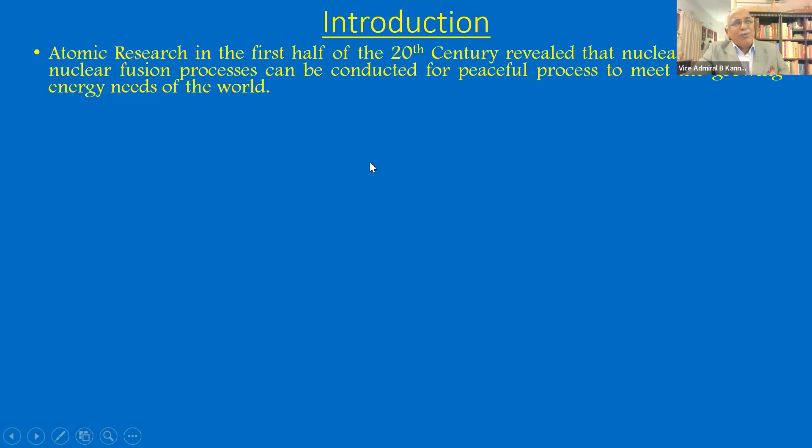As usual, I give an initial slide, which is an introduction to the topic. Atomic research in the first half of the last century, the 20th century, revealed that nuclear fission as well as nuclear fusion, both these processes, can be conducted for peaceful purposes to meet our growing demands for energy. Because all along we have been associating nuclear with the nuclear bomb, which was dropped at the end of the Second World War, or just before the end of the Second World War. But nuclear energy can also be used for peaceful purposes, as it was proved thereafter.

So fission reactors became very popular in the last 65 years. I'm just taking something like from 1955, 57 onwards - it became very, very popular. And today, there are 430 fission reactors operating in 30 countries, including India, to provide 1/10 of the world's energy needs in a clean form. Please remember, there is no carbon emission, or very limited carbon emission, when you have a nuclear power plant, unlike a coal thermal plant, which releases a lot of carbon. And today our major worry is carbon dioxide emission. So fission reactors are associated with clean energy, and 10% is coming from fission reactors.

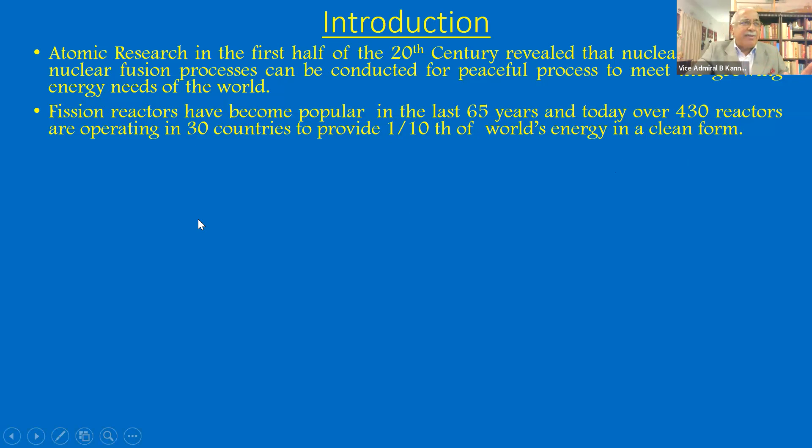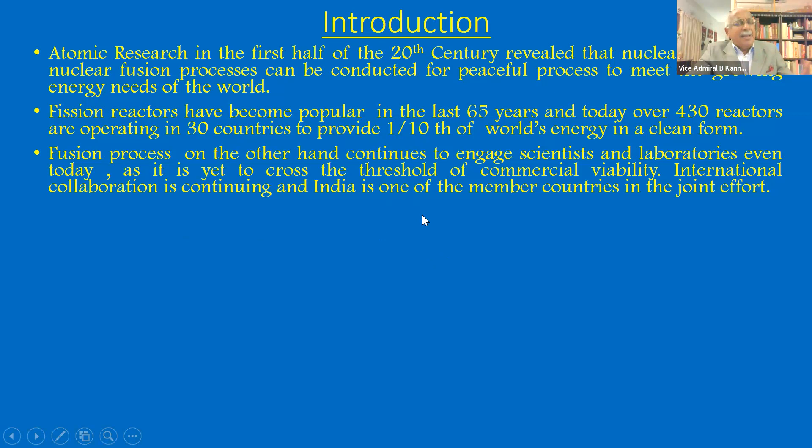Fusion process, which is the other way of getting nuclear energy, continues to be in the lab. It has not come out of the lab into the commercial viability sector. It remains as a process which has been verified in the lab. It has gone into prototype reactors, and there's a lot of effort going on by USA and France and many other countries joined together as an international collaboration to design, manufacture and operate a fusion reactor. But that has not happened. Some successes have taken place - I will talk about that a little later. But today, we have only fission reactors operating in the world. Everywhere in the world, it's only fission reactors which are taking place.

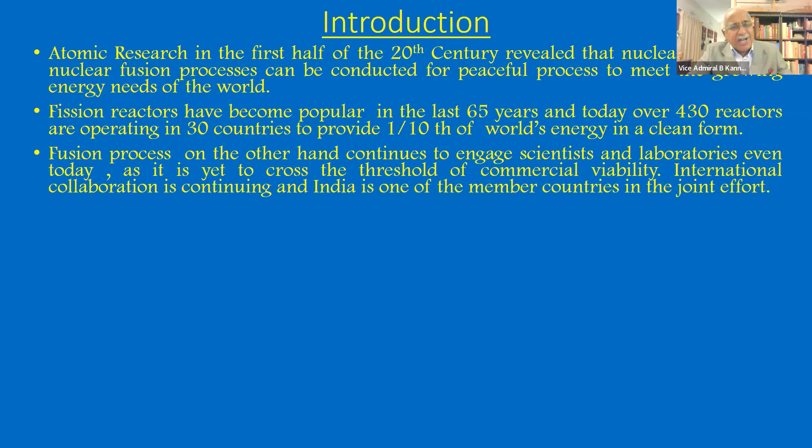But one important thing which you should remember: fission reactors require fissile material as fuel, and the most popular is natural uranium - that is uranium as available as an ore in the Earth's crust. So fission reactors require uranium, and India has very, very limited resource of uranium. Just remember this: reactors require uranium, and India has got very poor stock. Naturally, we have very poor stock of uranium in our country.

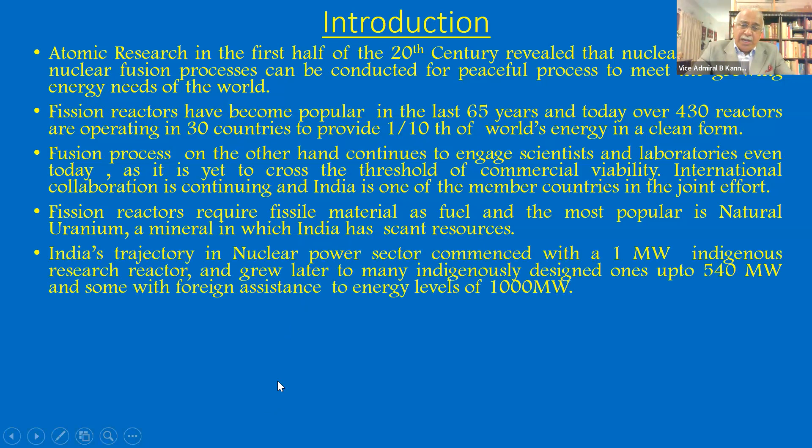India's nuclear power sector, if you see the starting, was a 1 megawatt indigenous research reactor. And subsequently, it grew from 1 to 100, 100 to 200, 200 to 540. We reached up to a 540 megawatt reactor made in the country, indigenously designed, and in some places we are taking foreign help. But recently, we have gone up to 1,000 megawatts - 1,000 megawatts is 1 gigawatt. There are some electrical engineers here, they will understand better. And with some foreign assistance, we have been able to set up reactors up to 1 gigawatt per reactor. India has also designed and manufactured a reactor for an Indian-built nuclear submarine.

So in a nuclear submarine, the reactor drives the submarine underwater. And that requires fuel as well, uranium. But there they use enriched uranium. Enriched uranium is more potent, more powerful. It can give more energy. And its life will get longer because it has got higher energy content.

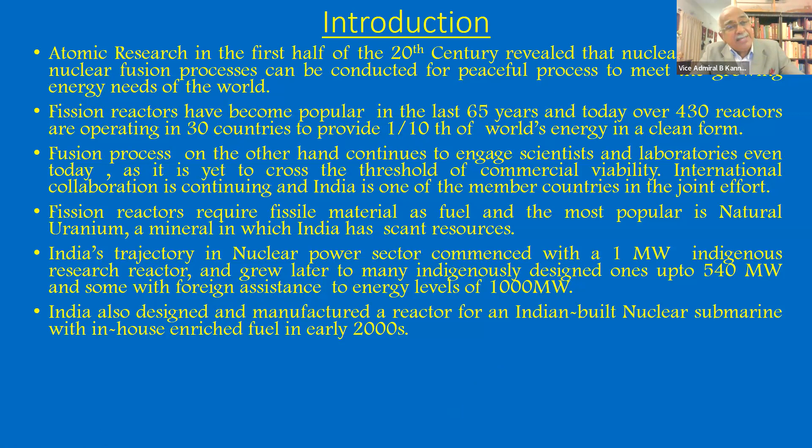So we have also achieved this in early 2000. So we have made a lot of progress in the nuclear power sector, not only for land-based reactors, but also sea-based reactors, which are installed on board Indian naval submarines.

With international focus on clean and green energy now to counter global warming, every country feels that they should have nuclear power available. And towards this, to enable every country, big and small, to have reactors available for them, the present technological solution is to go for small modular nuclear power plants. It appears to be a viable option, as it was discussed during the recent G20 meeting at Delhi in September 23.

But given the fact that India does not have enough uranium to last long, we are attempting some other scientific process to recycle used uranium. Spent uranium, we want to recycle by some radioactive process using some minerals which India has got in plenty. I'll talk about that as well.

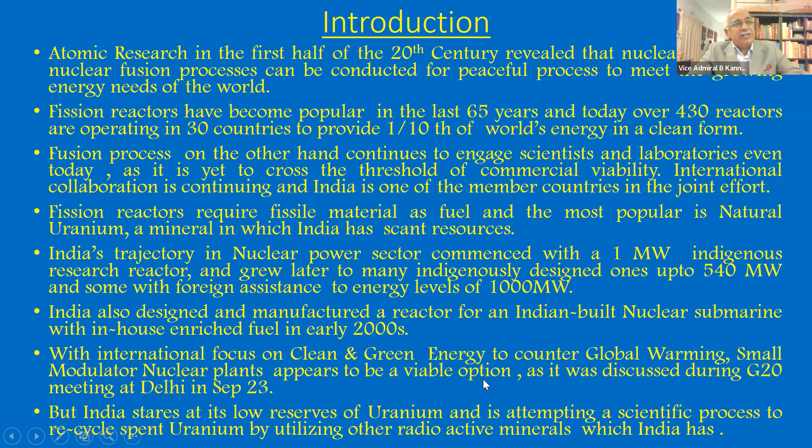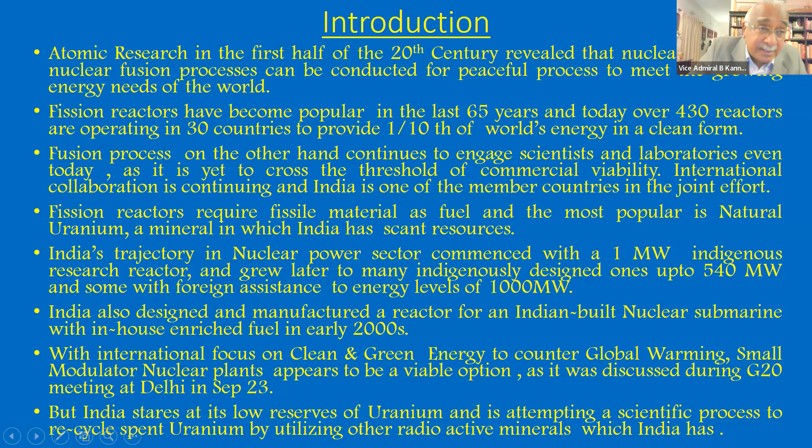So at the end of the introduction, I'm telling you that India has already started its trajectory. We have up to 1,000 megawatts reactor size. We started with 1 megawatt 50 years back. And we also got a nuclear submarine which has got our own reactor. And now we want to go ahead, but there is a problem of availability of uranium.

So I want to just clear a little bit of physics between fusion and fission. Please allow me to just go through 2 slides. It's a little bit of school physics. You must have learned it during school many years back, but let me go through it once. So in fission, there's a uranium atom. As you remember, uranium has got many neutrons and protons, etc.

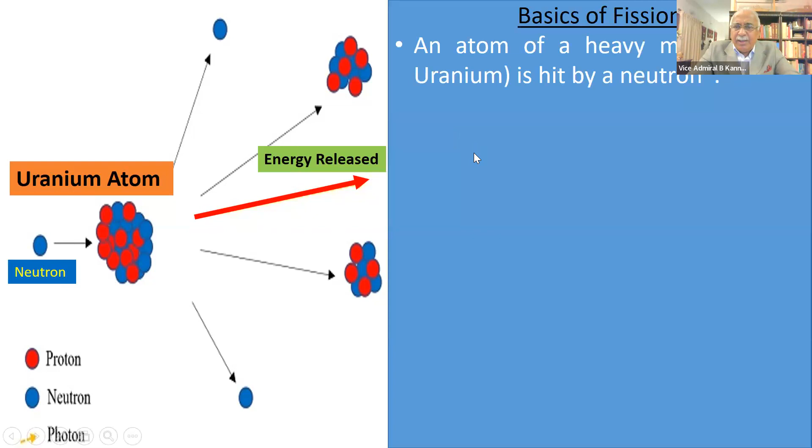So a heavy atom. If you can collide this atom with another high power neutron, it'll break into 2 parts. And when it breaks into 2 parts, these parts may not be equal. One can be big, one can be small. Some energy is released. That is the principle of fission. You divide this uranium into 2 parts. So heavy material is taken, split into 2 parts.

A lot of energy is released in the form of heat, in the form of radioactivity. And when it breaks into 2 parts, some free neutrons also get released. They will hit some more atoms. That becomes a chain reaction, and you will get a lot of energy released. If you can absorb this energy in some medium and then slowly release it for conversion, you get electrical energy. Because when this reaction takes place, you have to absorb that energy, moderate it, and convert it to electrical energy. This is the basis of fission.

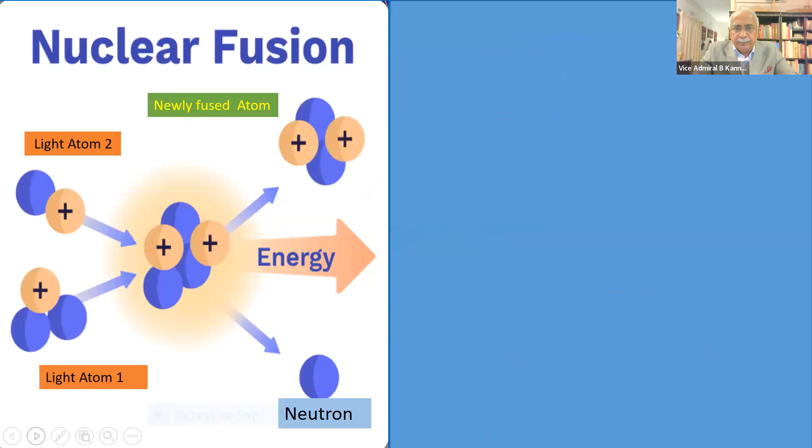Now, in the case of fusion, it is different. 2 light atoms. Fission was a heavy atom, uranium. Here it is a light atom. Normally you use, let's say, hydrogen, and you try to combine these 2 together. So you take 2 light atoms and make them collide with each other under high pressure and high temperature, and you will create a new atom. And some neutrons are released and some energy is released. This energy, if it can be contained, moderated and released, you'll get electrical energy.

But the energy released must be more than the energy you consume for creating high pressure and high temperature. High pressure means you have to run some equipment to pressurize it. High temperature means you have to heat up the container in which this is happening. So you're consuming some energy, and if the output of this fusion is less than that, then fusion cannot sustain. You're not getting more than what you're consuming. This is a problem in fusion technology. Scientists have not fully overcome this.

To get a fusion reactor of a fairly high rating, you should make a fusion reactor of 500 megawatts or 1000 megawatts, something like that. But that has still not happened. So the fusion process and its industrial conversion is still in the making. So we don't have any fusion reactors in the world at the moment. They're all in the experimental stage.

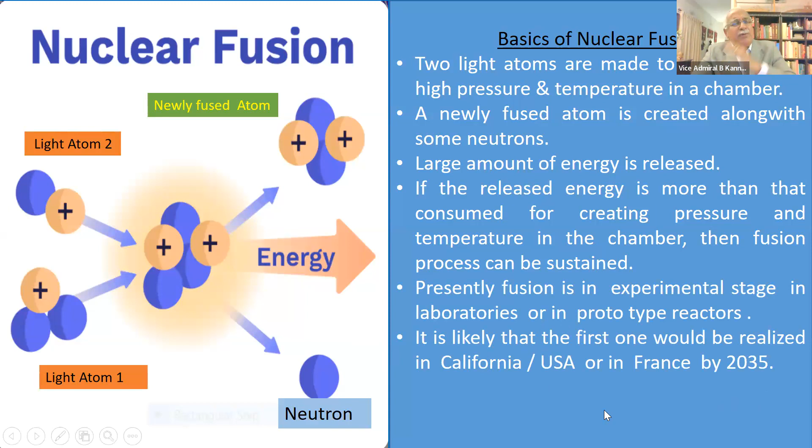So the only example we have for fusion today, tomorrow, and for the next 12, 15 years is the sun. The sun gives you energy throughout because of fusion taking place inside the sun. Light gas atoms get collided and they release a lot of energy. That is how you get the sun's energy.

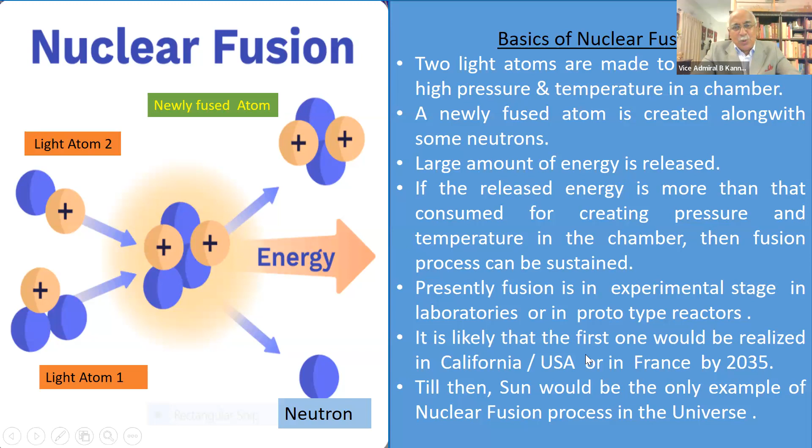So just remember this. Fusion is under experiment. Today, the only example where fusion is taking place in the whole universe is only the sun, which I'm sure you have learned in school. So I'll go forward. So in a fission reactor, back to a fission reactor, what is there? This is a reactor. I'll just go through some elementary things.

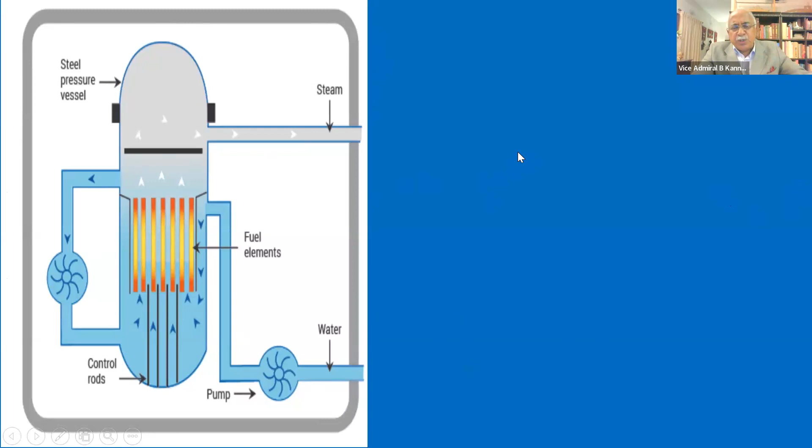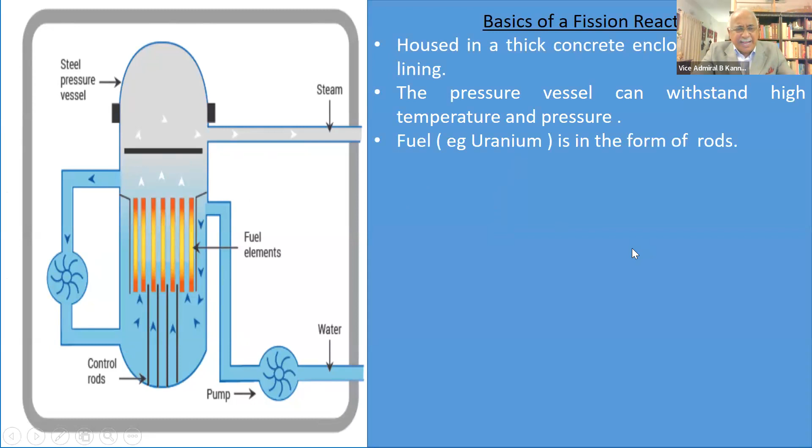Can you see this gray one? This is a thick concrete walled building, so that if something happens inside, the explosion doesn't come outside. So it is housed in thick concrete. The elliptical shaped one is the pressure vessel, which can stand temperature and pressure. Fuel is uranium. You can see the red and yellow fuel elements.

And there are control rods, which if they are inserted, the chain reaction slows down. If you take out the control rods, the chain reaction picks up intensity again, because the control rods have got some material which will absorb the neutrons, which are actually triggering the chain reaction. The input water comes through a pump, gets heated up and goes out as steam.

So the input water is normally normal water, H2O, but there are many reactors which use heavy water, which is called D2O, deuterium. So we will not bother to find out what's the difference between normal water and heavy water, but heavy water is a better moderator. It can slow down and absorb the energy and make it a far more controlled transfer from water to steam.

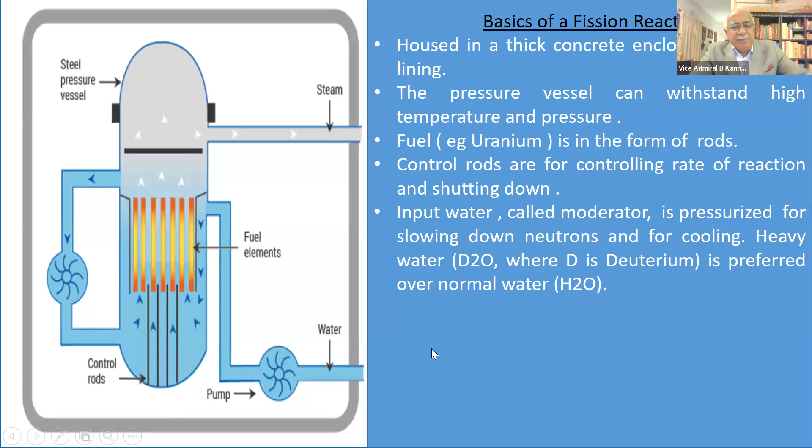So steam comes out, steam will run a turbine, and you will get electricity, which you can give to Kerala State Electricity Board. Of course.

Sorry? Can I have these questions at the end of the talk? Okay, sir, you can continue.

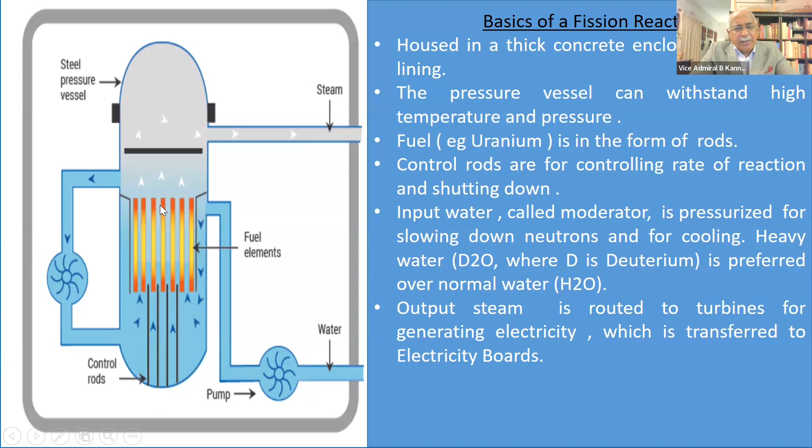Yeah. So the steam is running a turbine and it generates electricity. That is how electricity is produced. For all reactors, this is the basic. There'll be a few more added things as we talk about different reactors; that's not our interest today, to look at reactor physics. But this is the fundamental. Water, uranium emits a lot of neutrons, they collide and a chain reaction takes place and steam comes out.

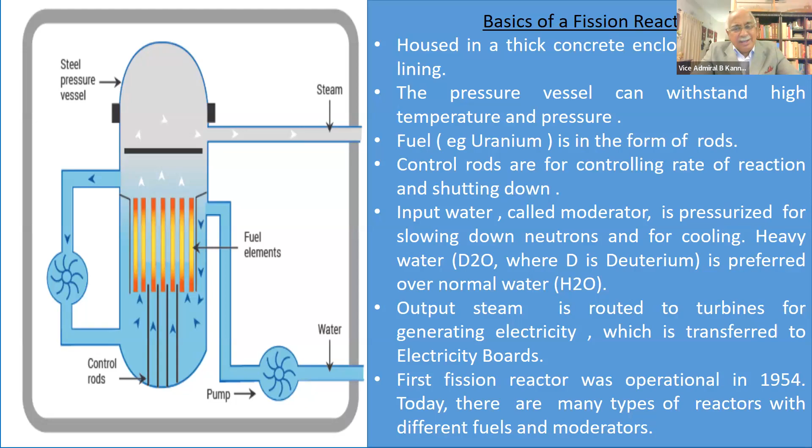From 1954, when the first fission reactor came, many types of reactors have been designed. Some have been made vertical, some are made horizontal, some have got normal water, some have got heavy water, some are pressurized reactors, some are not pressurized reactors. Like that, different types of reactors have been designed and they are put to use in the world today. So these are the types of reactors in 65 years.

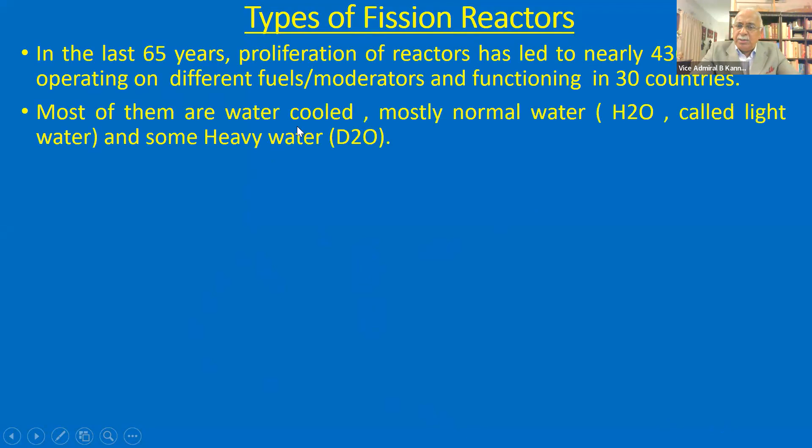As I told you, there are 436 reactors in the world. There are 30 countries having reactors, including India. Most of them are water cooled, mostly normal water called light water. Some are with heavy water. 70% of reactors out of these 436 are pressurized. Why is it pressurized? So that water doesn't boil at 100 degrees centigrade. Water will boil at a much higher temperature, because then there is better control of the energy which is coming out from the chain reaction.

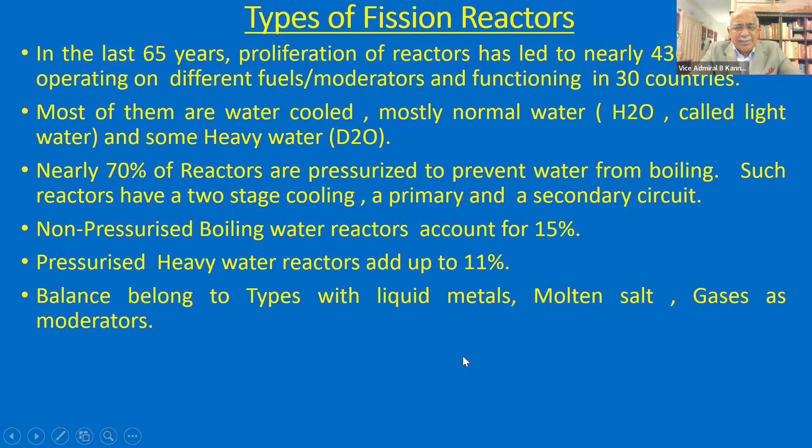Normally, reactors have two-stage cooling. From there, it'll go to steam and then it'll come down to a lower temperature of steam. Non-pressurized boiling water reactors account for 15%. Pressurized heavy water accounts for 11%. Then the balance belongs to some molten salt, sodium, gases as moderators, etc. So there are different types of reactors.

What you need to know, mostly it is light water, which is called ordinary water. Some of them use heavy water. That's all you need to remember. And all of them require fissionable material as fuel. And the most common is natural uranium. Now, natural uranium contains two types of uranium. You should know this just for information.

There is something called uranium U-238, it's a number for it. And the other one is U-235. U-238 is 99.2%. The balance is U-235. So if you can increase the percentage of U-235 by some technique, which is called enrichment, then you will be able to get a better fuel, a fuel which has got more potency, more power.

So normally reactors use enriched uranium. I will tell you where in India we are using it. Up to 5% enrichment is used for reactors. That means you enrich it to 5%, 95% will be U-238. But if you want to make a bomb, then you have to enrich to 20%. That is a very complicated facility by which ordinary uranium is converted to enriched uranium, for which you require a different type of enrichment facility.

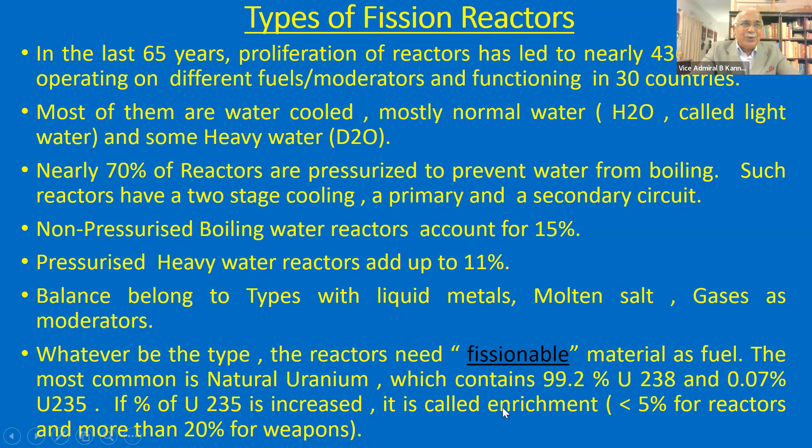We are not going to discuss that in this because we don't have that sort of facility, to my knowledge, in the country. So we will discuss only what is used in the power sector. So what are the global trends? Very important. Just see this.

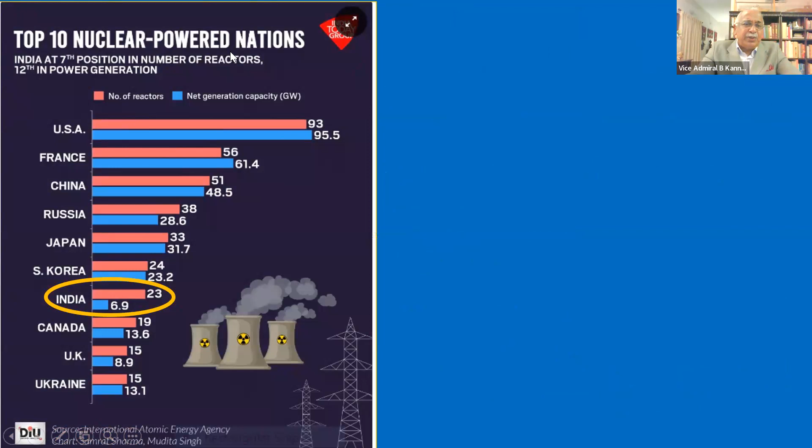The top 10 countries which use nuclear power in the world: topmost is USA. It has got 93 reactors generating 95.5 gigawatts, more than 1 gigawatt per reactor. You may recall 1 gigawatt is 1,000 megawatts. France is next, China, Russia, Japan, India 7. India has 23 reactors

which produce 6.9 gigawatts. This slide which has been made, there's a correction to it. India had 23, but it has come down to 22. One reactor has come down. I will talk about it a little later, but just remember, India has got only 22 land-based reactors now. It had 23 earlier.

The important point which you should remember: the USA average for one reactor is 1 gigawatt. In India, the average is 0.3 gigawatts. We are operating with reactors which have got very low power. That is why our total is only 6.9 gigawatts. We are not anywhere close to the high average the other countries have, which the list already shows. You can have a look at it. But remember, India's average power is only 0.3 gigawatts at this point of time.

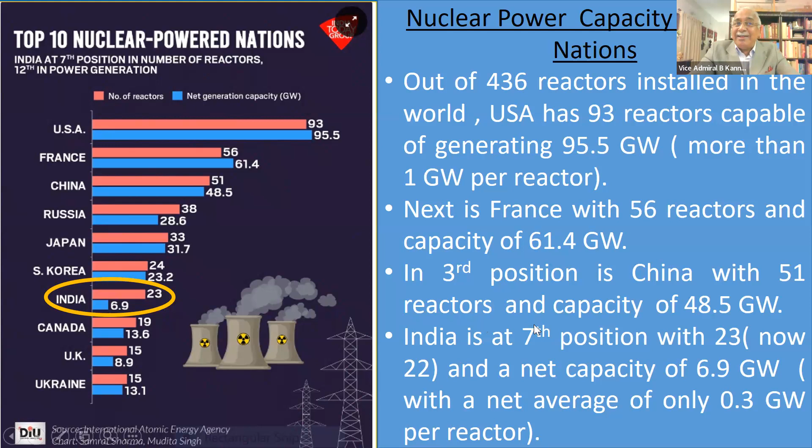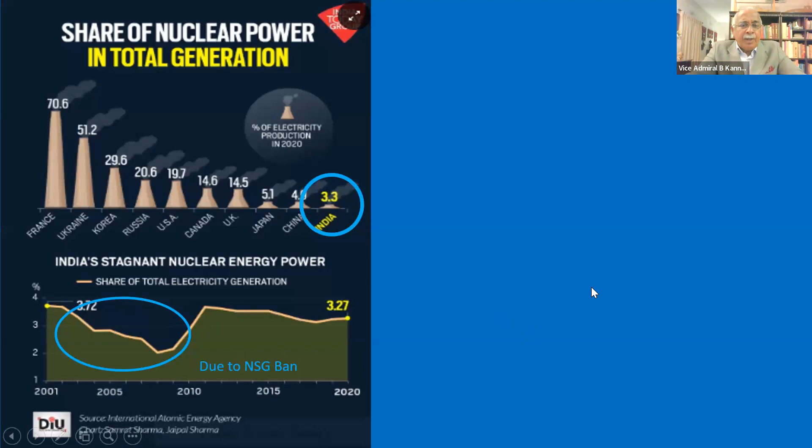Right. Now, how much nuclear power are we using in India compared to what is coming from solar, wind, thermal power plants, bio, and natural gas plants? All this put together, India is using only 3.3% of power from nuclear power plants. 70% of France's power is from nuclear power plants.

70%. Then comes Ukraine, and you know many things happened in Ukraine during the war. Some of the power plants had to be shut down, so this 51 must have come down now. Then comes Korea, Russia, USA. USA is just about 20%. But we are far lower than all these countries. We are using only 3.3% of power from nuclear power plants. And even that, we have been able to restore.

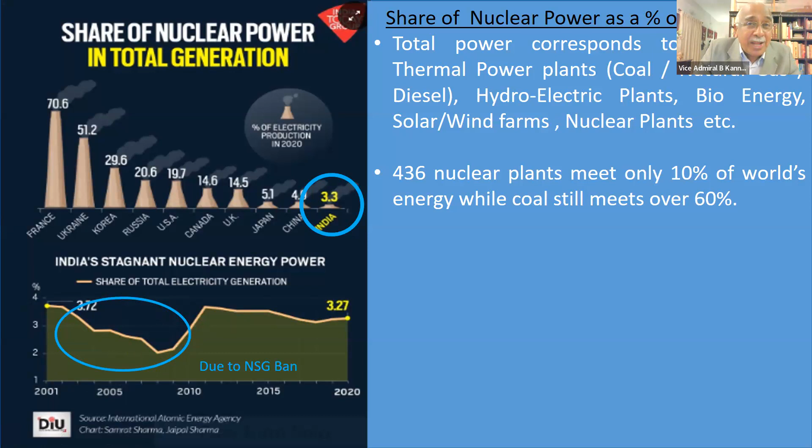Look at this graph. We were around 3.7 in 2001. After that, we came down to very low values of 2%. After 2008, it started going up, and now it is 3.2. Why did this happen? Because after we did the Pokhran 2 nuclear blast, the international Nuclear Suppliers Group, NSG, stopped giving us uranium. If we don't get uranium from abroad, our nuclear power plants will have to shut down or reduce their output.

You see this graph. From 2002 till 2011, we were under the ban. The ban was lifted in 2008, but by the time we started getting uranium, it was 2010. All those years, our nuclear share came down to very low levels. Now it has come back to 3.27, which is also low. France is at 70, many other countries are about 20, and we are at 3.3. That means we are still depending on coal, natural gas, solar, wind. Solar and wind are renewable energy, good, but coal is the major one.

So our nuclear power plants are producing very little power for the country. You may remember Kudankulam, Kalpakkam, or Tarapur. But the fact is, it is not enough to meet even 3% of India's requirement, 3.2% now, while the world average met by nuclear power is 10%. So we need to see how to get over this problem. We are dependent on uranium being exported to us from abroad. Only then can nuclear plants survive. Otherwise, what do we do?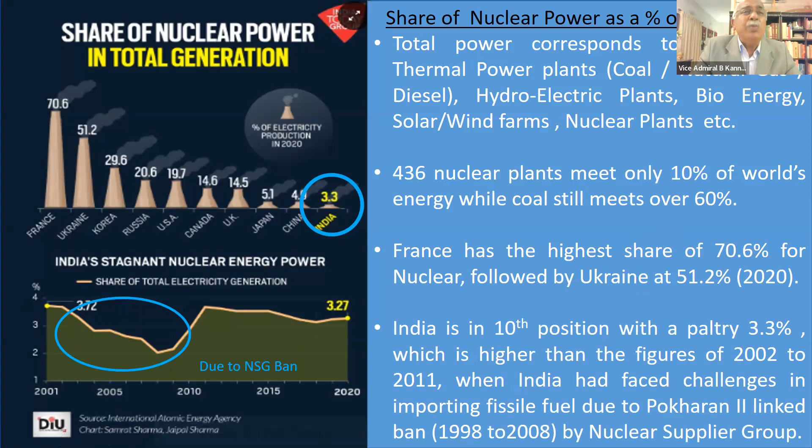So let's go forward. Who's building new reactors now? Let us have a look. You remember in 1986 we had the Chernobyl accident in what was then part of the USSR, now part of Ukraine. After that, a lot of controls came to give safety higher regard in nuclear power plants. Then the Fukushima accident in Japan in 2011 happened after the earthquake. So there were a lot of worries about how safe nuclear power plants have to be.

So there have been different approaches by different countries. Should we build or not build? Should we forget about nuclear reactors or not? How to make them safe? These are all big questions. After all that, we find China is building 21 new reactors now. China already has 50 plus, and building 21 more, it will become 70 plus in a few years' time. It is also making the world's first small modular reactor with a capacity less than 300 megawatts.

India is making 8 new reactors. At this point of time, we are building 8 more, which will increase our capacity from 6.7 to 14.2 gigawatts. It will complete maybe in another 7-8 years' time from now.

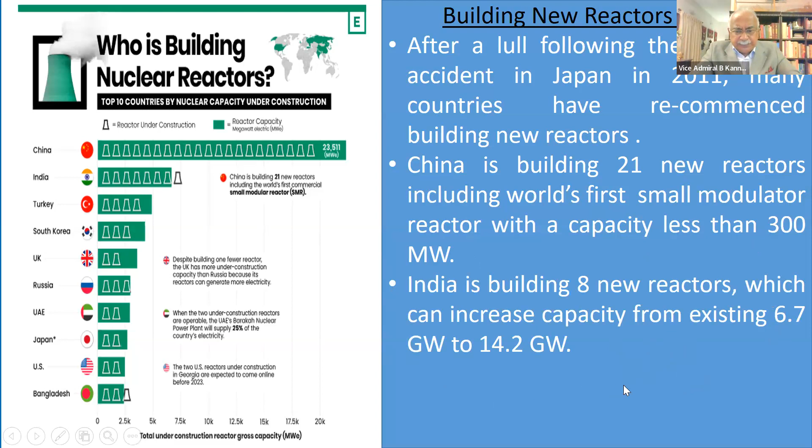And just for information, the biggest reactor which is being built is in UK, in a place called Somerset, which is 1.7 gigawatts power. So many countries have gone back to nuclear power, even though there have been some accidents 12 years back in Japan and much earlier in Chernobyl. So a lot of safety mechanisms have come into nuclear reactors, and countries are going in for nuclear.

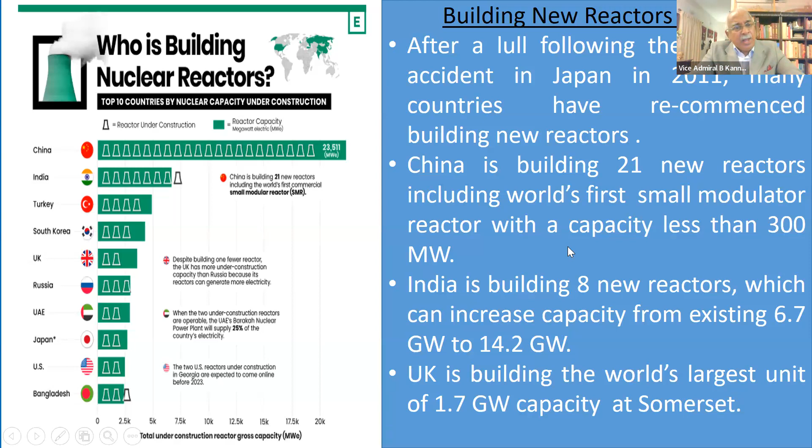At the same time, countries have been shutting down reactors. This graph is about countries shutting down reactors. Reactors are being retired. Either they have become too old, technologically obsolete, technically not viable, or politically the country takes a different stand. So USA has cut down 41 reactors. UK has cut down 36 reactors.

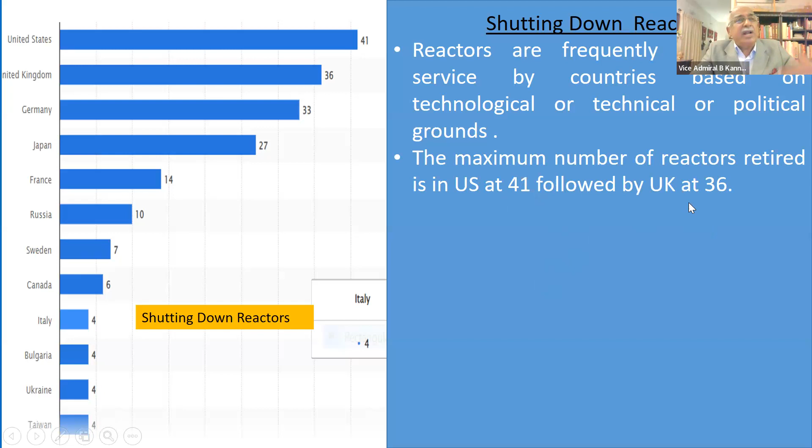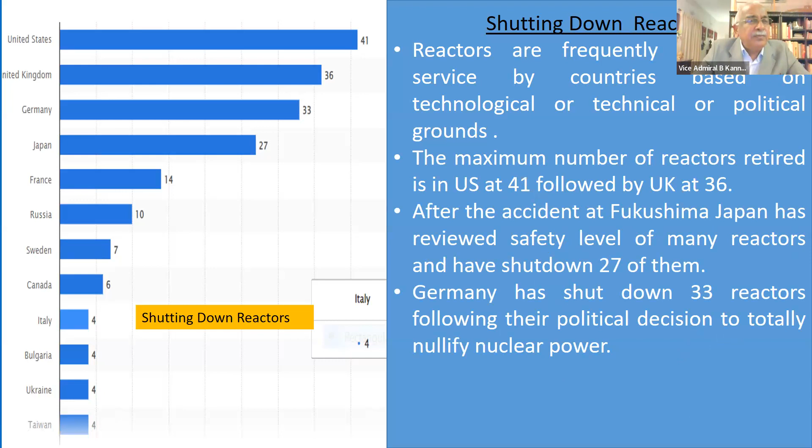Japan has reviewed all the reactors after the earthquake and shut down 27. Germany has shut down 33 reactors and said, we don't want nuclear power. Now, Germany has taken a political decision not to have nuclear power at all. So they're shutting down all the reactors one by one in their country. India also shut down one plant.

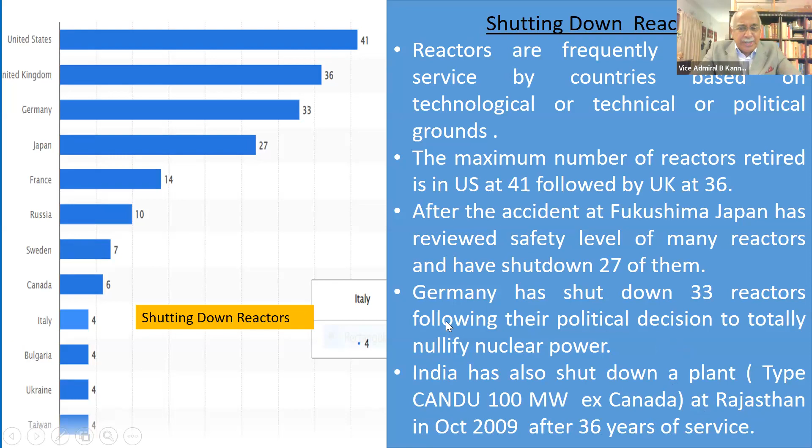Now you remember, sometime back I showed you a graph, 23 reactors. And then India decided to shut down one plant, that is in Rajasthan, which had completed 36 years of service. So India has got only 22 reactors now. So let us look at India's nuclear power sector a little more closely, how it has been growing.

Uranium, we still have to get fuel. But remember, USA gave us enriched uranium, not natural uranium. A little bit of enrichment was there in that. And it had a rating of 1 megawatt. Apsara worked as a facility for training, experiments, and science education. It was shut down in 2010.

And by then we had developed many reactors and many other training centers, and the Apsara was recommissioned after 8 years to make radioisotopes for medical purposes. So even today, Apsara is working as a small reactor which makes radioisotopes for the medical field. So this is our first reactor in India. Very humble beginning, 1 megawatt we started.

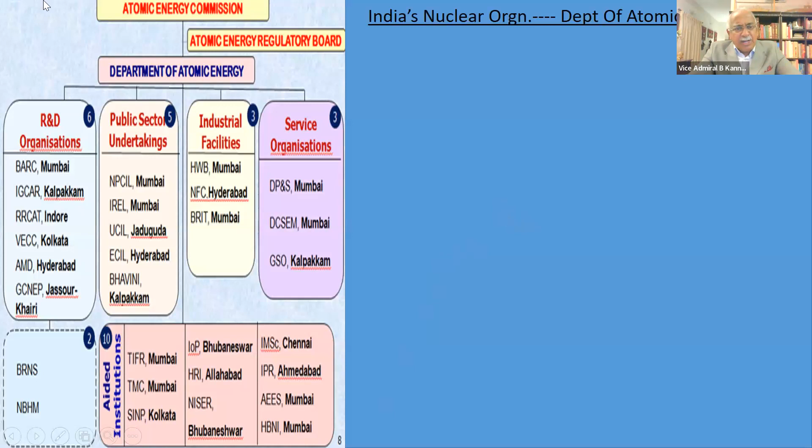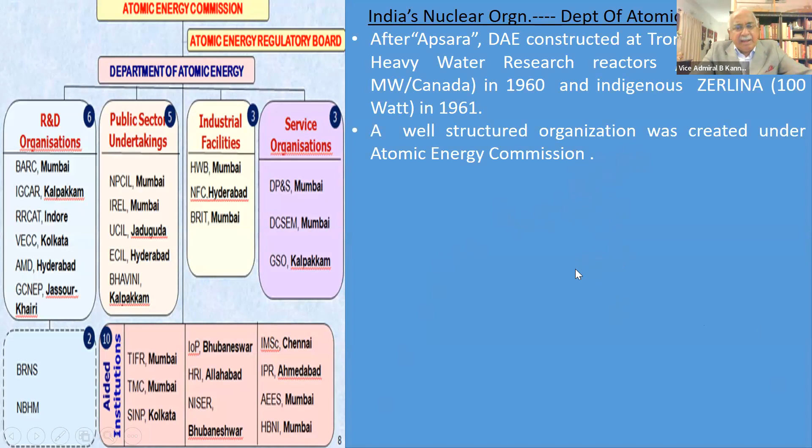Simultaneously, the Department of Atomic Energy created an organization structure, which is given on the left. They constructed 2 more reactors for research called CIRUS and Zerlina. A well-created organization structure was made with safety and R&D and industrial facilities, etc. So in the last 65 years, India has achieved a high level of standardization in nuclear reactors.

And India has mainly been using, as I said earlier, pressurized heavy water reactors. We have been using that category, pressurized heavy water reactors fueled by natural uranium, which is U-238. Only thing is we have to get uranium from somewhere. Some uranium is available in the country, some has to come from outside, or lots of it has to come from outside. We'll talk about it as we go along.

So BARC has indigenized a lot of equipment, pumps, steam generators, nuclear fuel loading mechanism, control rods, motors, so many things they have indigenized. They have started making heavy water in the country. They also started making fuel rods from uranium. All those facilities have been started in the country. So our level of indigenization is very high in the nuclear power sector.

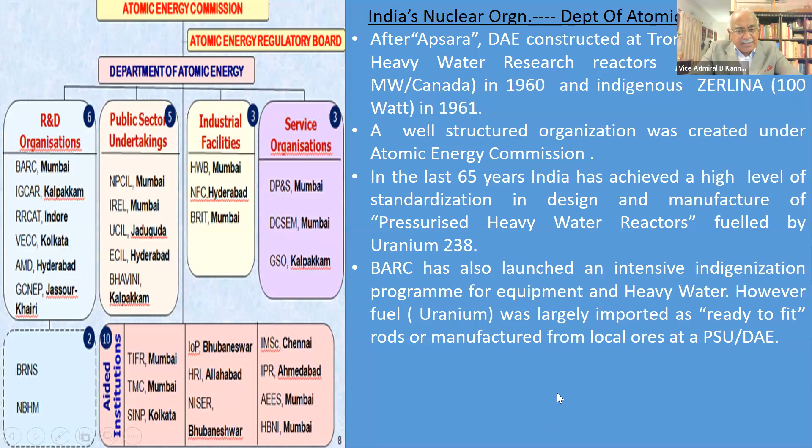We have got 22 nuclear reactors now, and all are operated today by a PSU company called NPCIL, Nuclear Power Corporation of India Limited. They operate all the power plants. Day-to-day operation, maintenance, repair is all with NPCIL. Very important point you should remember. The Department of Atomic Energy controls NPCIL, which operates all the reactors.

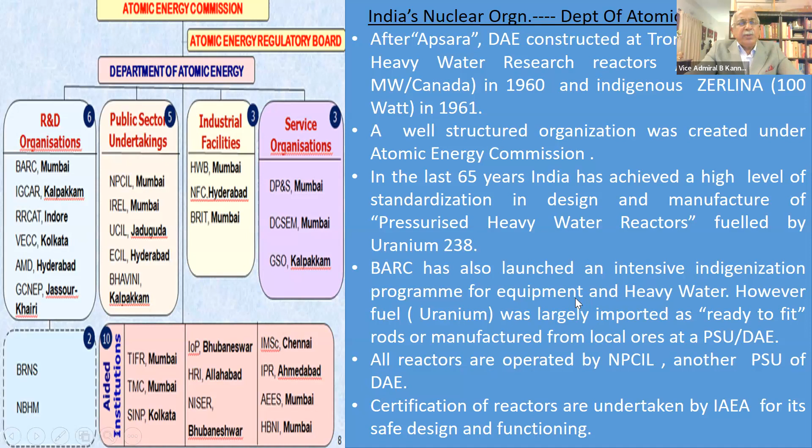And all the certification of reactors is undertaken by the international agency for its safe design and functioning. There could be 1 or 2 reactors which still have not had the certification from IAEA. As we go along, I'll find out why they have not got it.

So if you look at India's reactors, wherever it is yellow color, that state has got a reactor, maybe more than 1 reactor. So let's look at that. 22 reactors, they are in 7 townships. In the north, we have Rajasthan and Uttar Pradesh having reactors.

In the west, Gujarat and Maharashtra. In south, Karnataka and Tamil Nadu. So these are the 6 states where reactors are today stationed. There are no reactors in the east side, eastern states. There's nothing in the northeast. There's nothing in the island territories. There are no reactors as of now. It's only in the 6 states.

They contribute 6.7 gigawatts, as I told you, while India's installed power capacity, that means thermal plants, plus solar, plus wind, plus biogas, something else, all put together is 410 gigawatts as of December 22, as of last year. And out of that 410 gigawatts power installed, nuclear plants are giving only 6.7. So it's less than 2% as of now, installed capacity.

So there is an aspect of very low contribution from nuclear power. We have seen it is always around 3%. Now installed solar has come in a big way, wind has come in a big way. They have taken up the power sector so much higher. The nuclear contribution has shrunk to less than 2%. So nuclear power is not growing fast. It's growing very, very slow. In fact, at this point, it is stagnating.

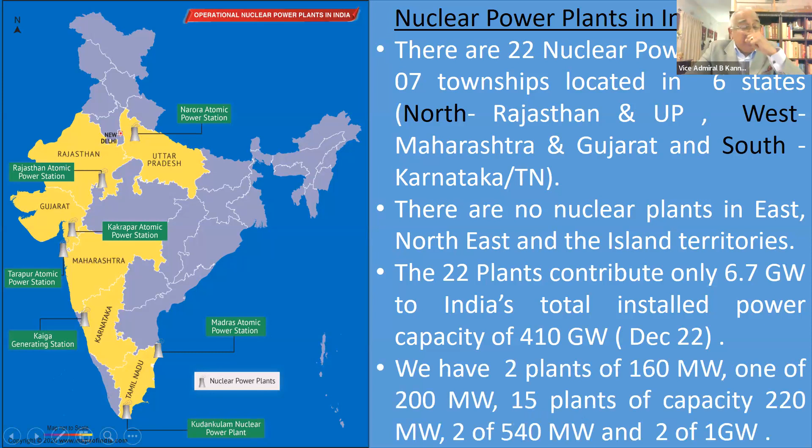We have two plants, just give the capacity, 160 megawatts, one of 200, 15 of 220, two of 540, and two of 1 gigawatt. Sometime back, I told you that we also have 1 gigawatt reactors. Both of them are in Kudankulam. So Kudankulam reactors, which have been installed with Russian assistance, are of 1 gigawatt capacity, something which many other countries have in plenty. So we have also reached 1 gigawatt, but as you know, Kudankulam has come into power only in the last 7-8 years. Kudankulam 2 has also come now. So that is a good step forward.

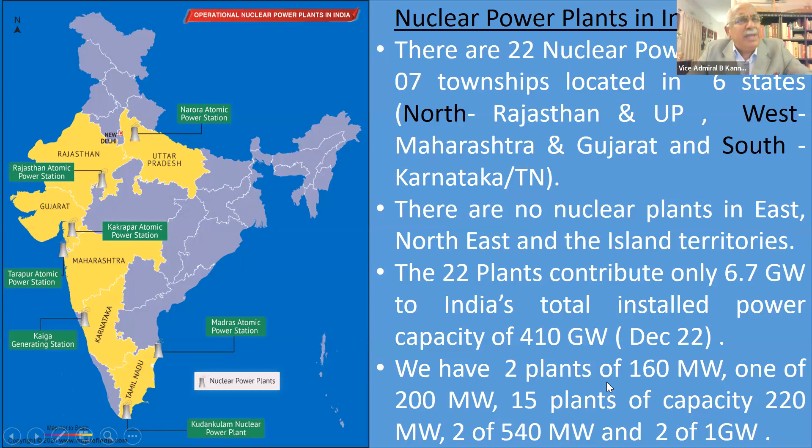But all other reactors which we have indigenously designed and manufactured, some with foreign assistance, are 540, 220, 200, 160, like that. Well, that is the way we are growing. That is the way we have reached up to 1,000 megawatts. Now, DAE has got some very good operational highlights. The first reactor, Apsara, finished 54 years before retiring in 2010. As I told you, in 2018, it was recommissioned for radioisotopes for the medical field. Tarapur atomic power plants have completed 50 years, and they're still working.

600 reactor years have been completed by NPCIL. That means if a reactor works for 1 year continuously without shutting down for maintenance, it's called 1 reactor year. NPCIL has completed 600 reactor years since its setting up. 35 times NPCIL has achieved 1 year long continuous operation of a plant. And nuclear fuel complexes and heavy water plants have been set up.

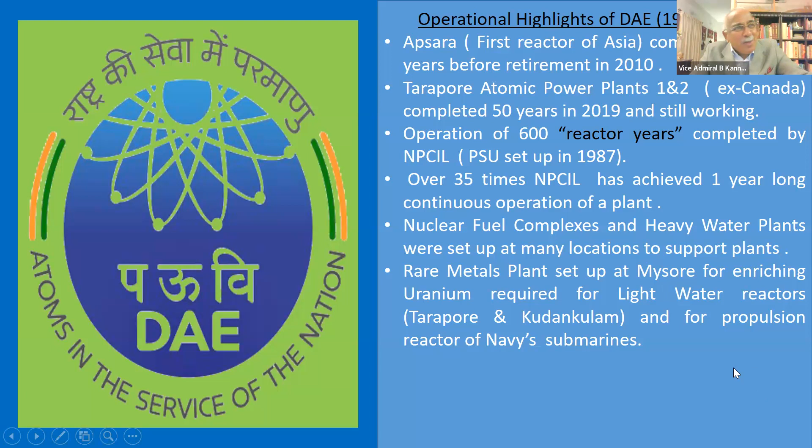A rare metal plant has also been set up at Mysore for doing enrichment of uranium, because we want a little bit of enriched uranium for our Kudankulam project. Kudankulam project works on enriched uranium, that is U-235 and not U-238. So we are producing it ourselves in Mysore. Tarapur, which had originally come from Canada, also requires enriched uranium. So that also we make in Mysore. And for the nuclear submarines, as I told you, they use enriched uranium for propulsion. So that's also made in Mysore. So this has also been set up by DAE. Very creditable, they have done it.

And we have been having only really limited resources. So we have been getting imports from Kazakhstan, France, Canada, Russia, etc. And we have signed agreements with 14 countries, not only for fuel, but also for some equipment and some technology transfer, etc. So DAE in the last 65 or 67 years has done creditably very well. And they have taken forward our nuclear power sector.

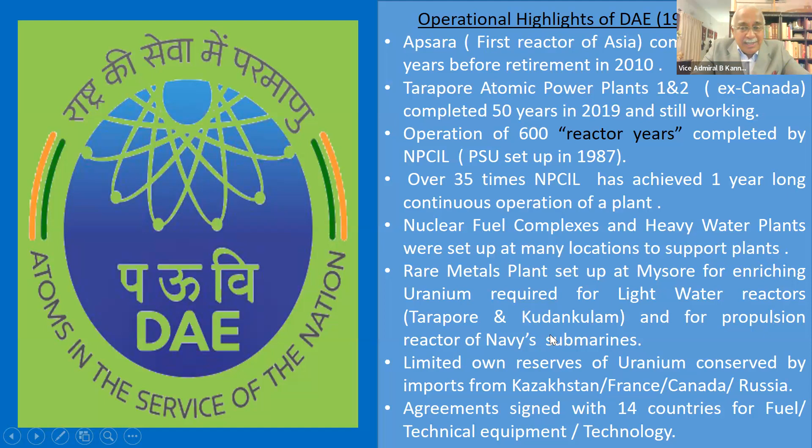That has not happened. The Ministry of Power wants nuclear power plants to generate 19 gigawatts by 2030, so that India can meet other commitments which it has promised towards carbon control. Because nuclear power is a clean and green energy. Less coal will be burned then. But this is unlikely to happen from the nuclear side. So nuclear power plants may not meet the goal which has been set for them by the Ministry of Power, which is the coordinator for the entire electricity in the country.

So there could be a shortfall in nuclear power generation in the country, and this is linked to our inability to have enough uranium. So at the end of this part, we are saying nuclear power has started well, grown well, but the last almost 10 years, or make it 7-8 years, we have been stagnant. We're not growing, we are at the same level. And we are not going forward because we are not getting enough fuel, which is uranium. We are depending on import, which we don't want. We want another solution. That is what we are going to see now.

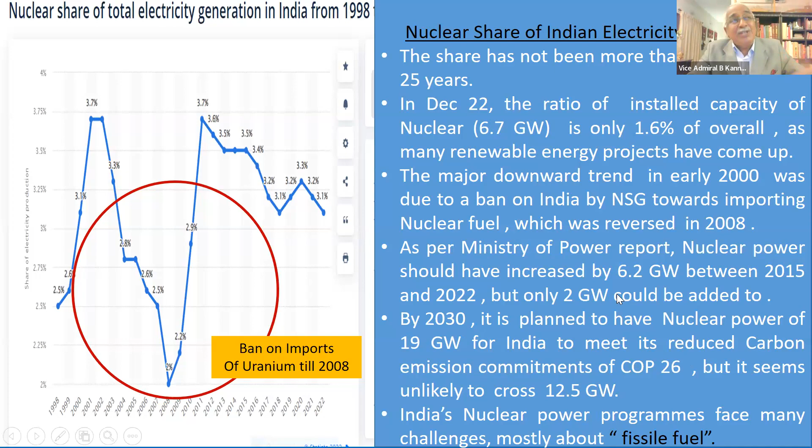So what are the challenges faced by the nuclear power sector? There are 3 challenges. Let me take the first challenge: we are vulnerable to imports from uranium. We have to import uranium, and if other countries stop supplying uranium to us, we have a problem. So we should find some other method for recycling uranium. Let us see a little more on this factor.

This is the uranium produced in the country. We are producing about 400 tons of uranium from our limited mines. By the time you process that, you get very little uranium out of it. I'll show the details. So we get about 400 tons from our mines in Andhra Pradesh, Rajasthan, Jharkhand, etc. And some uranium can be enriched to U235, which is also required for Kudankulam, and submarines require it too. Our Mysore facility enriches some uranium to U235.

If you take 200 tons of natural uranium and run a power plant to get 1 gigawatt for 1 year, you can get the same power with 1 ton of U235. So you see the ratio: 200 tons of natural uranium gives you 1 gigawatt for 1 year from a power plant continuously, but the same power you get with 1 ton. The ratio is 1:200. So natural uranium is not a very potent fuel. That's all we have.

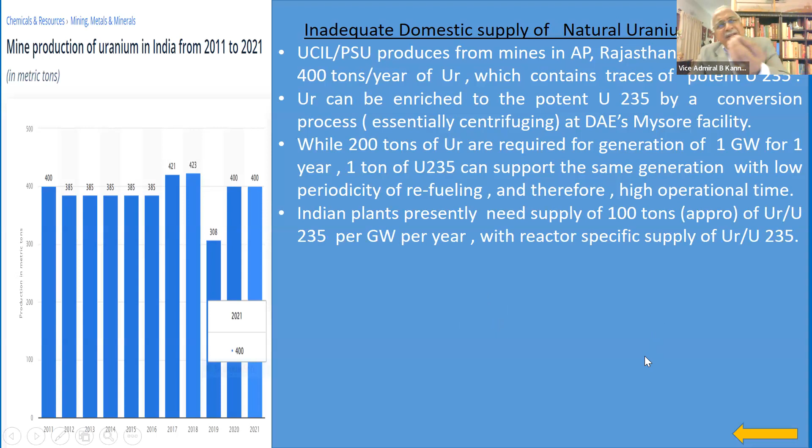So let's see that. We require 100 tons of uranium every year per gigawatt. Now this 100 tons can be natural uranium - say 85 and 15 tons of U235, or 90 plus 10, or 95 plus 5, whichever way you want it. It also depends on the type of plants we have. We know there are some plants in India which take only U235. So let us take 90-10: 90 tons of natural uranium you require, 10 tons you require as U235. For every gigawatt, we require that much fuel.

So you can imagine how much ore is required from the mines, because that will be significantly higher. If you make nuclear power 20 gigawatts in the future, you will require 2,000 tons a year of uranium and U235 in some combination. Earlier we said 90-10; now it will become 20 times more, so 1,800 and 200. This will be required for 20 gigawatts.

So we have a problem. We are not able to enrich enough, we don't have enough uranium. We have to import. So we are not able to go forward on the nuclear power sector as fast as we want. It is slow, it is not growing.

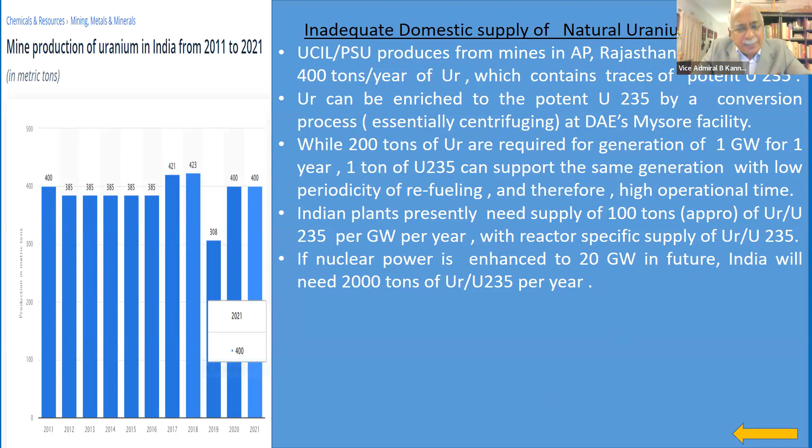Our reserves of uranium are only 75,000 tons - Andhra Pradesh plus Rajasthan plus Jharkhand mines all put together give you only 75,000 tons. And if you take our requirement of 2,000 tons a year for 20 gigawatts, either we can have 50 gigawatts for 15 years, or 25 gigawatts for 30 years. You multiply both and it comes to 75,000. So we have a problem that we are not able to go full hog on this for some reason.

I told you every gigawatt requires 100 tons. So if you got 50 gigawatts, 50 into 100 is 5,000. And you want to run for 15 years, 5,000 into 15 is 75,000 - uranium finished. Or don't go for 50 gigawatts, go for 25 gigawatts, then you can run for 30 years. Or go to 15 gigawatts, then you can run for some 40 years. So something like that, you have to work out.

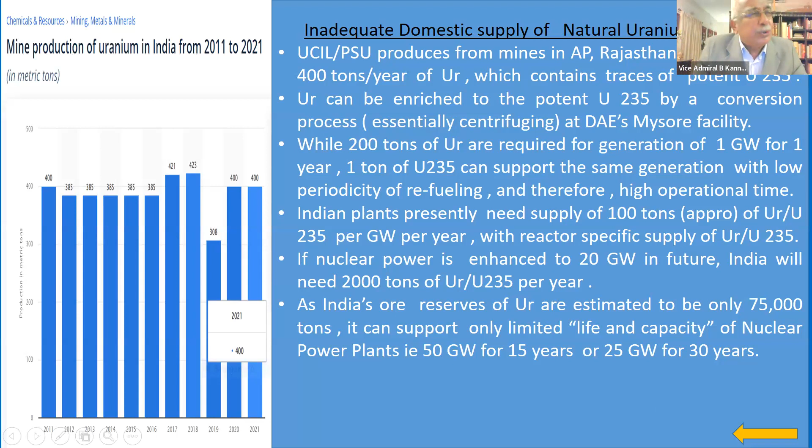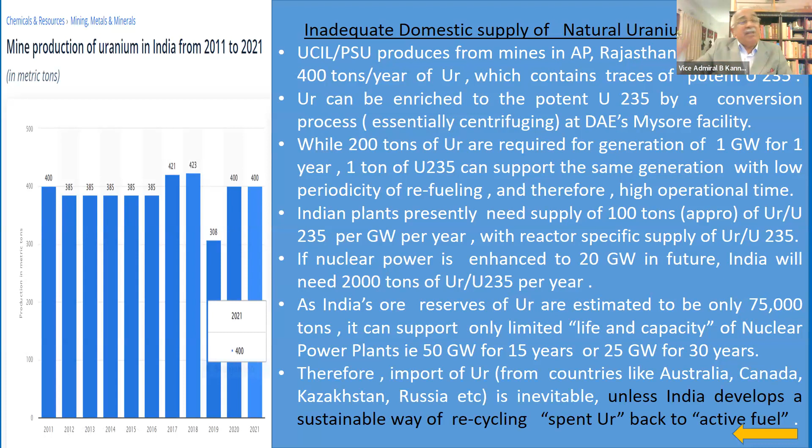How do we give fuel to the nuclear power sector? It's a very serious issue which needs to be addressed. We can import - today people are giving, but tomorrow it may not happen. Somebody will say, sorry, we're not giving you. So we have to bring spent uranium back to fuel by some method. So I told you challenge number one is we are vulnerable to import. Let us see challenge number two.

We have to recycle uranium by some radioactive process and use what is available in India. Thorium is available in plenty in India. 25% of world's reserves are in India. We have only 1% of uranium of the world, but 25% of thorium is available. So if we can use thorium in some method to recycle uranium, that means spent uranium or used fuel.

Put through some process and bring it back to life. Is it possible? I'm going to show a process which the DAE is progressing, and this will be slightly complicated, but just understand we are trying to recycle spent uranium into live uranium so that we can use it again and again, so we don't have to import. So this has got 3 stages.

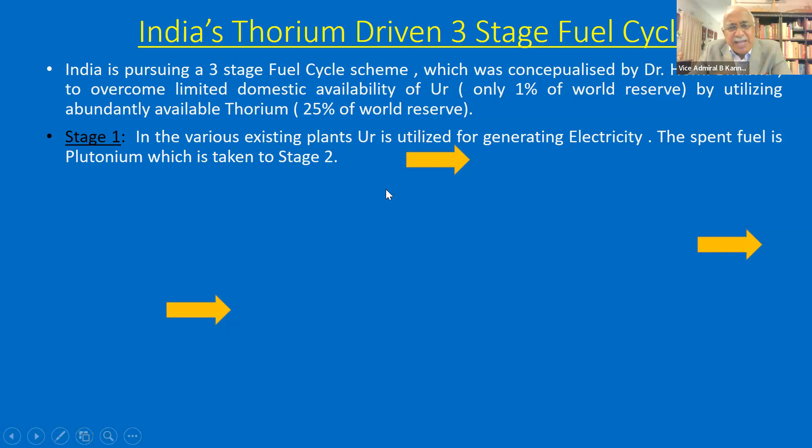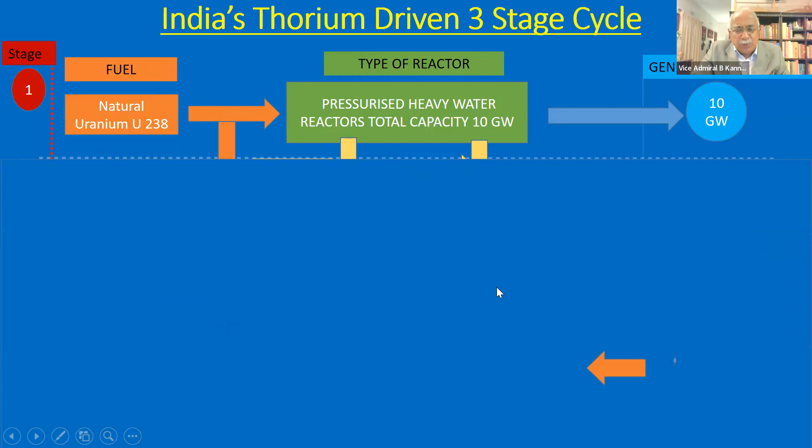Let me show you that. Natural uranium, which is there in reactor, is used and it gives you power like it is giving now. And it has got an output which is plutonium. Now I'll show you, this will go to stage 2.

When it goes to stage 2, this plutonium you put in a blanket, like a blanket, around which thorium is put. And then the moderator is something else. And then you run a reactor, another reactor called stage 2 reactor, which will take thorium and used uranium and plutonium and give you power.

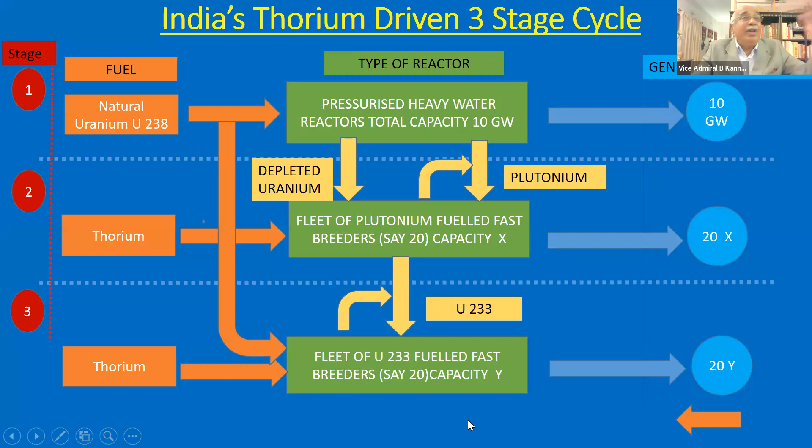But in addition, it will give another output, which will go to stage 3. So in stage 3, it is another type of reactor, which will use again thorium and give you fissile material, which can be reused. So what will happen is you use thorium to get our spent fuel used, and we are using thorium. So what you need to understand, a little complicated process.

This was conceptualized by Dr. Homi Bhabha in 1960s, and I will tell you where we are now. So this was conceptualized by him. We are using our thorium and used uranium to run reactors in stage 2 and stage 3 and produce power.

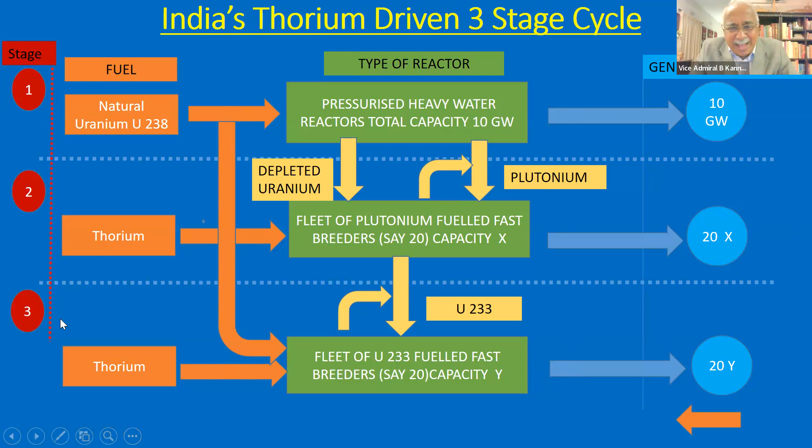And whatever little bit uranium you have in the country, you run in stage 1. So stage 1 with little uranium we have, that spent fuel is given to 2 and 3, where thorium is used, some complicated process happens, and you get power. So at the end of it, you have got nuclear power with available thorium, which is in plenty, and scant resources of uranium, which we have in the country. But we require large number of reactors of stage 2 and stage 3 to make this happen.

But in India, stage 2 and stage 3 have not become operational. Stage 2, they have been trying for last 13 years almost, but it has not become ready, not become functional. There have been some technological problem, some technical problem, and unless this happens, we will continue to import uranium. So the delay in converting spent fuel with the help of thorium has not been successful.

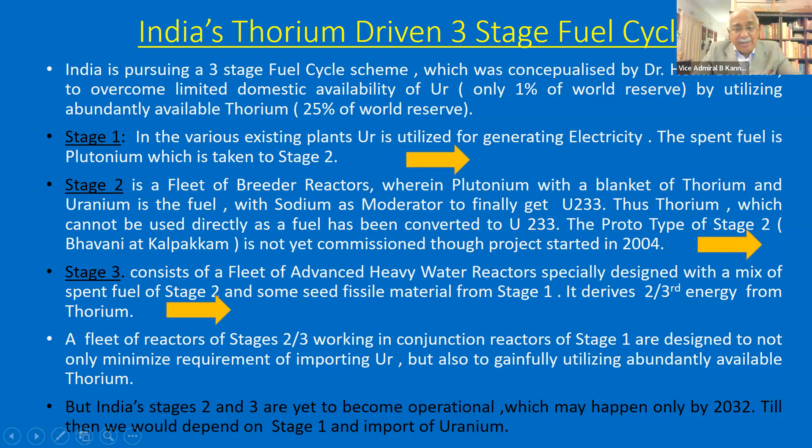Delay has cost our nuclear power sector to slow down and not enable it to contribute to India's overall power sector. But still, we are making some more reactors. As I told you some time back, we have got 22 plants. We are going to build some more plants for additional 8.9 gigawatts. My appreciation is it will be by 2032. When both these put together, we'll have 33 plants. We'll get 15.6, which would be lower than what Ministry of Power wants.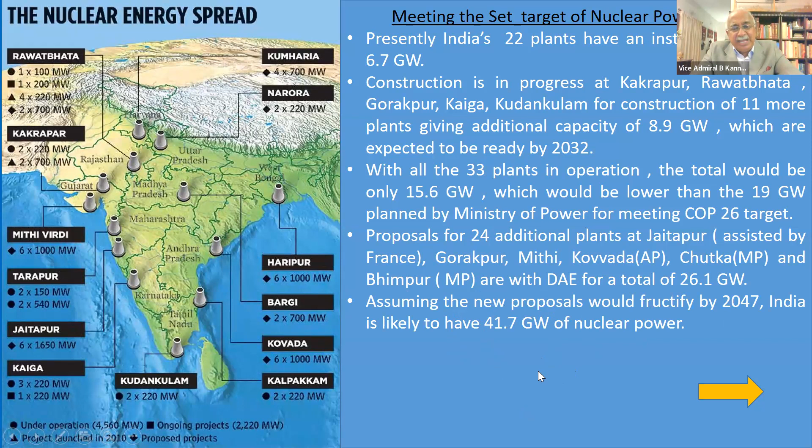That can happen only if stage 2 and stage 3 reactors, which are using thorium, become successful. Then many more reactors can be made, and we can increase our power output from nuclear reactors, some working on uranium, some working on spent uranium plus thorium. So we have to get our stage 2 and 3 reactors working.

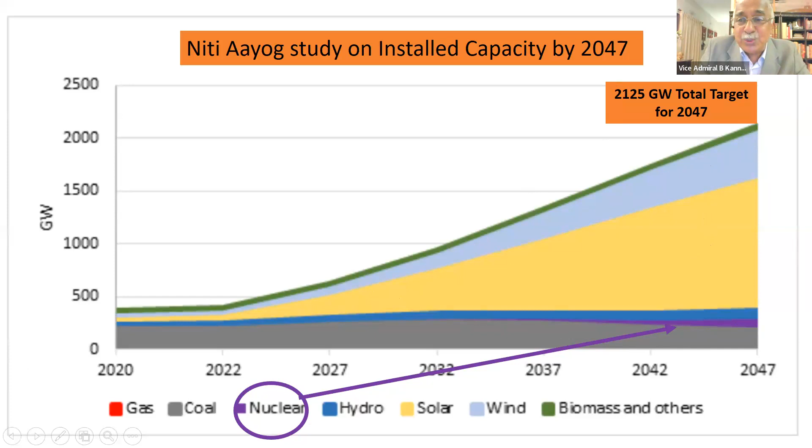Otherwise our nuclear power sector will have serious limitations. This is the major challenge for our DAE. This is how India's power requirement will grow by 2047. The small violet colored strip is nuclear, the rest are wind, solar, coal at the bottom, then hydro, and very little nuclear. Even that we may not be able to get unless stage 2 and 3 of our nuclear power program become successful.

So let me come to conclusions. World gets 10% of electrical power, I told you, but India gets less than 3% from nuclear power. India's reactors total 6.7 gigawatts only now, which can meet 3.3% at best.

Nuclear power program is scheduled to expand to 33 reactors by 2032 and 47 reactors by 2040. Niti Aayog wants at least 80 gigawatts to get 3.8%. The present contribution, if you want it to reach that level by 2047, it should go to 80 gigawatts. And that is a handicap because our natural uranium is very limited.

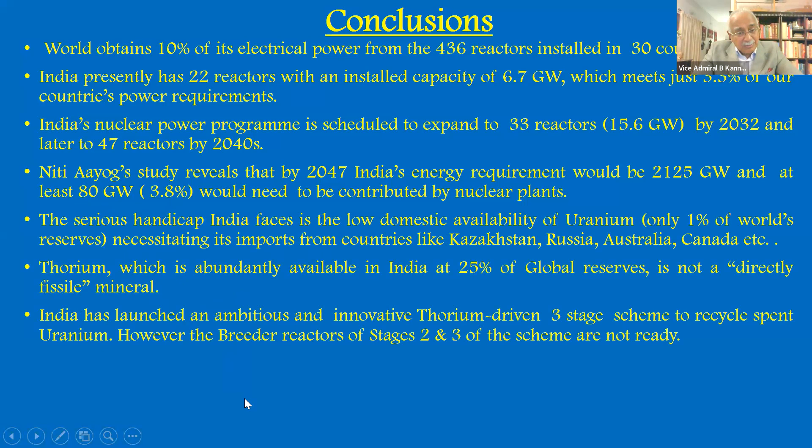And therefore the thorium process has to succeed, which has not been successful till now. Once it gets proven, then you produce a large number of stage 2 and stage 3 reactors, 10 to 15 of them you'll have to produce.

If you recall, in the newspaper two days back, Kerala government said we are going to get a nuclear reactor. That nuclear reactor Kerala government was referring to is either stage 2 or stage 3. The first step, stage 2, is still not ready, at the moment it is under trials in Kalpakkam.

As and when they get cleared and are operating well, then some 15 of stage 2 and 3 reactors will be built all over India, and Kerala also will get one nuclear reactor. But I think that will be close to 2040 or 2035, not before that.

So we have a huge challenge. Nuclear power sector has been growing steadily, safely of course. We can very proudly say our nuclear power sector has been very safe in the last 6 decades, but at a slow pace, which is becoming slower and slower day by day because of the fuel problem. We need to overcome this by our own process so that we can contribute from nuclear reactors, clean energy in good measure, at least 3-4% of our overall requirement, unlike many other countries which have gone to 70%, 60%, etc.

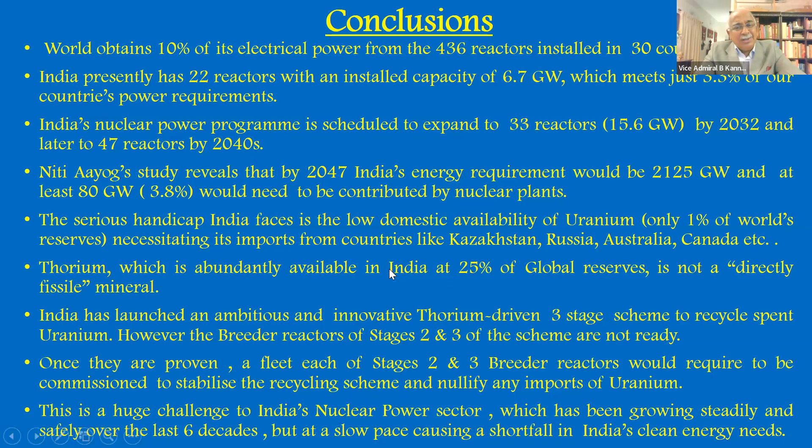And if there are any questions, I can always come back to a slide. Thank you, sir, thank you very much.